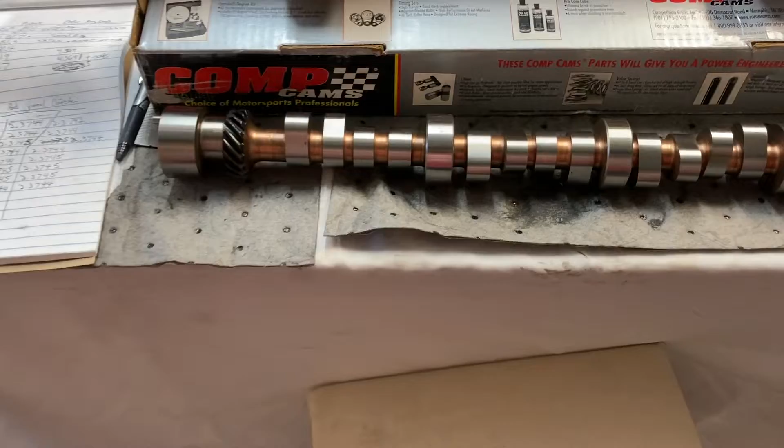Question number one, what cam am I running? This is a Comp hydraulic roller. There's a part number, I've shown you this before, some of the specs, and you'll see it's from 2007. So this is a new old stock cam I got from a special source, I'll say, Mr. Rodney Bird.

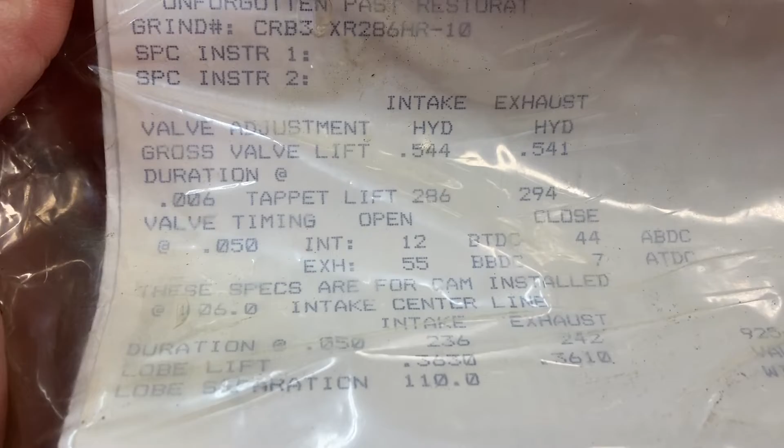And Ed checked that for me for straightness at Ed's Machine. There's a cam card, we'll use it here shortly. And we'll be checking the center line. It's a 106.

Before I stick this in the engine, I'm gonna get it cleaned up, some brake cleaner, lubed up, all that jazz.

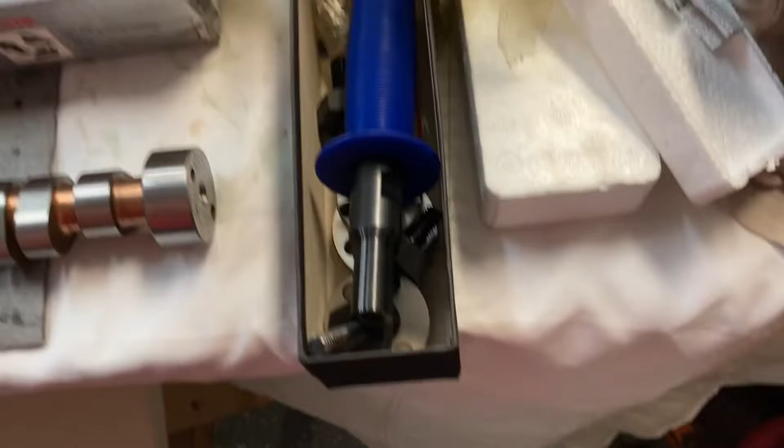I actually had a viewer a while back send me this awesome camshaft installation handle, and it's really nice for stuff like this. It's got all your adapters and such, bolt onto the front of this. This is a 3-bolt, so it'll bolt onto the front and you can use that big, beautiful, heavy handle instead of a bolt or whatever else. That's what I'm used to using. So I've used this once so far and it worked out really nicely for me.

Over here, I got this tech tip from Ed's Machine as well. Put you a sheet of paper under your magnetic base so it doesn't scratch up your brand new resurfaced deck.

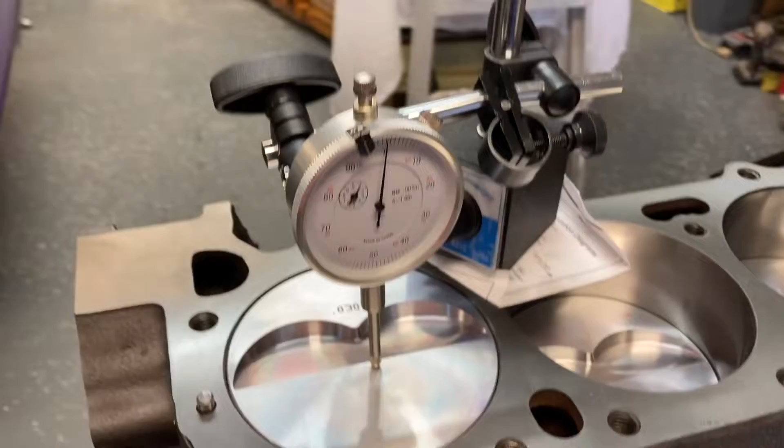See the lines there? So I have found top dead center just by setting that up, zeroing it out. And as I turn, oh yeah, you'll see my new snout socket on. But as I turn, we watch, it's going away from the zero. I'll flip my ratchet back.

She comes back to the zero and touches. That's it, no more. If I keep going, it goes like that. I don't want that, so let's put her back on zero.

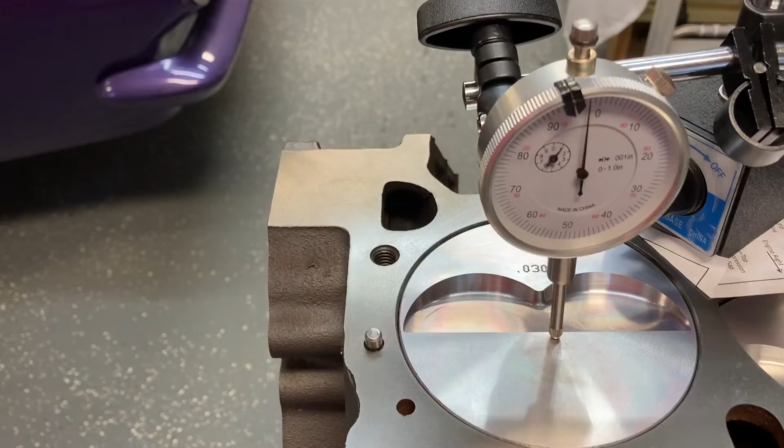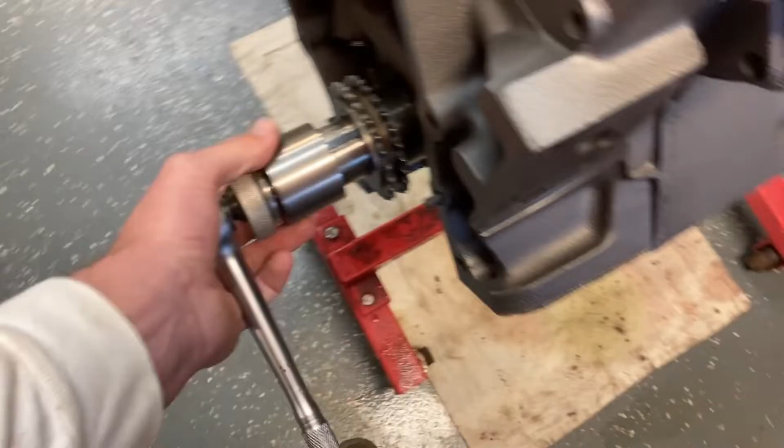Right there, my camshaft degree wheel will go on this knurled nut here just shortly, but I want to get the cam stuck in first.

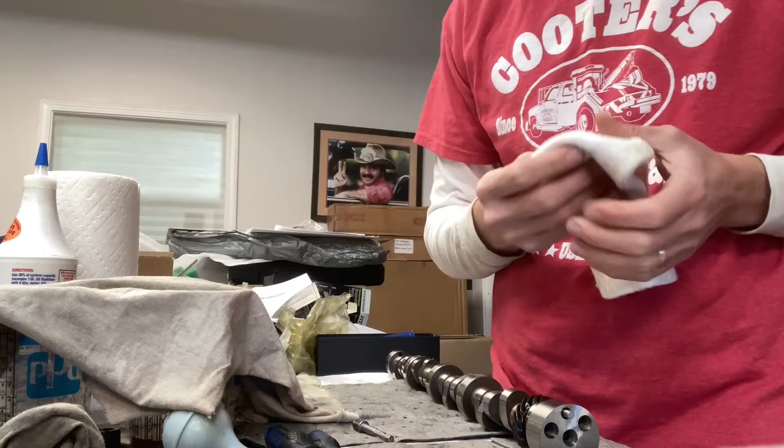Obviously I'll wipe out my cam bearings, lube it up, be sure she free spins. I got a new sock here. See, I wiped some red marker off with it a minute ago.

Get it lubed up, soak her down. It just comes with that kind of rust preventative stuff on it, and he may have coated this in the past few years.

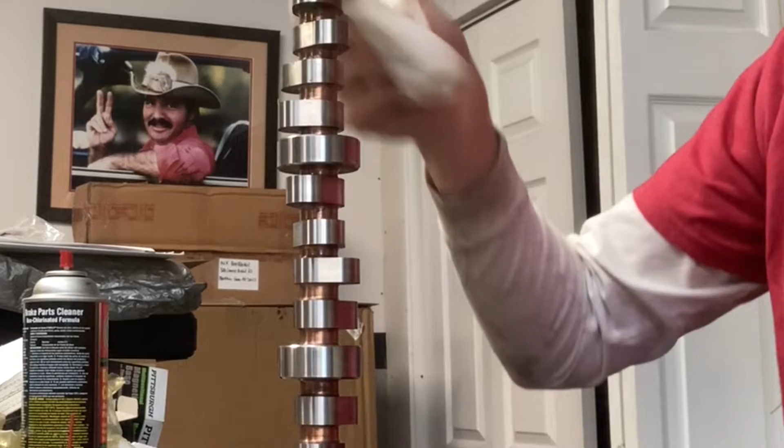It's a nice billet core, which are not really super, you don't see them as often anymore. They're becoming less available, let's say. And this camshaft may not be the perfect grind for this engine.

It will work, I think it'll work really well, especially when I tell you what I'm doing with it. So you saw all those specs and the differences I'm making.

Number one, I'm using 1.6 rockers. I've got getting some rockers from Mr. Rick Seaman. If y'all haven't seen his channel, check it out. He does a step-by-step build like this, except it's of a Hemi. Probably the best Hemi build you'll see on YouTube that I've ever seen on YouTube, for sure. So go check that out if you have not already.

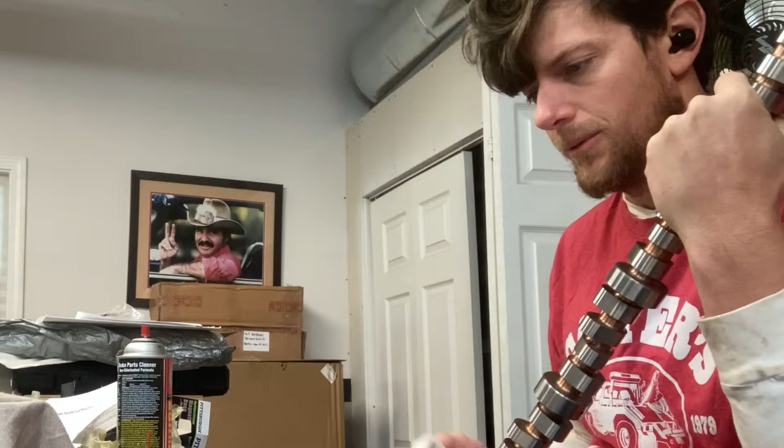So that'll bring my lift up, I think, to about .568. Add a little duration, different sources tell you different things on that. I read a Motor Trend article that said it could add up to 20 degrees of advertised. That seems like a lot. So just do your own independent research and come to your own conclusion on that.

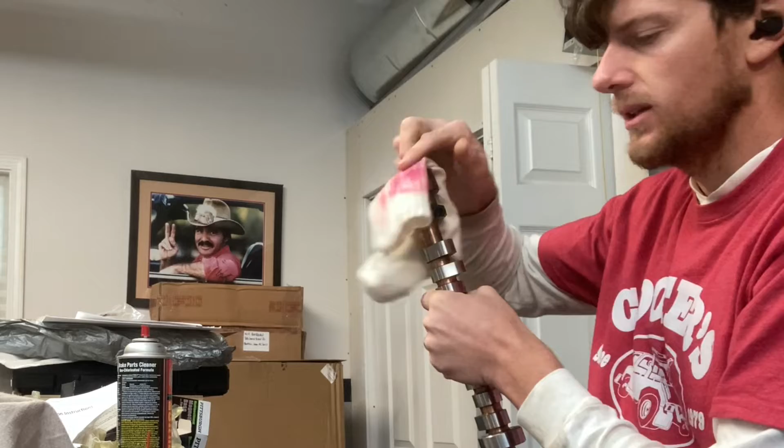There we are. Okay, so here's how this works. They give you different sized ends, whatever you want to call them. Then it has this recessed Allen bolt. The Allen bolt goes in, screws into the end of your cam handle.

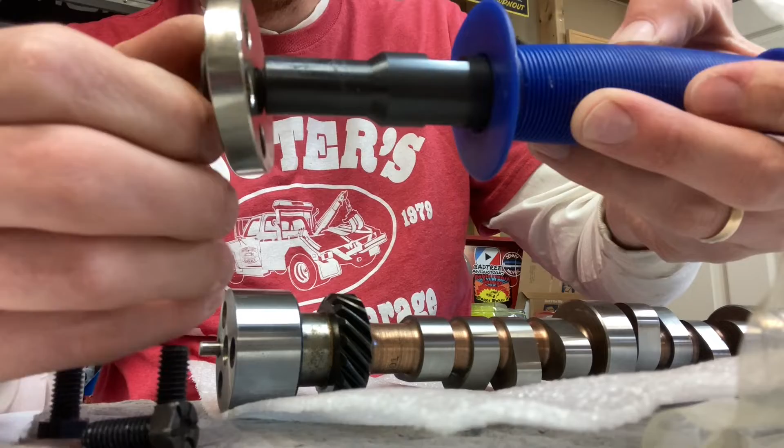So I've already matched that up. I need to get the correct size Allen wrench and maybe just keep one in the box. Allen wrench in, give her a tighten up. Doesn't have to be super tight. And then that goes on the front side of your cam.

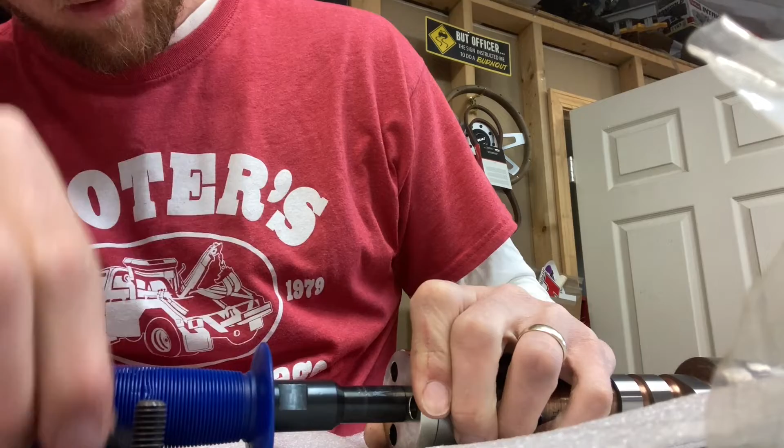Very simple, I dig this thing, it's cool. I believe Mr. Biggin Johnson gave me this. That's a name I cannot forget.

And I don't think I'll be able to use these bolts with my cam handle, but I'll check. These are three factory bolts for a 3-bolt cam in a Mopar. They came out of a 413. I don't know if they'll work with my cam handle or not. Yeah, they're close. Number 3.

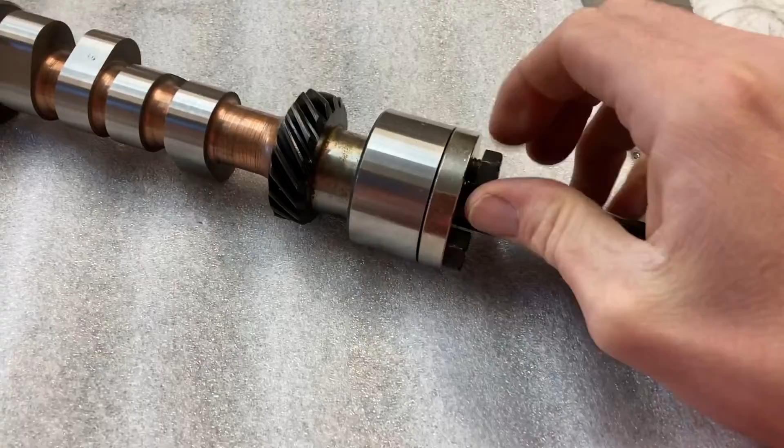Got my camshaft right here. I'm gonna use my semi-synthetic assembly lube from Lucas. I'm only doing the journals right now. I'm not worried about the lobes, those just get engine oil later.

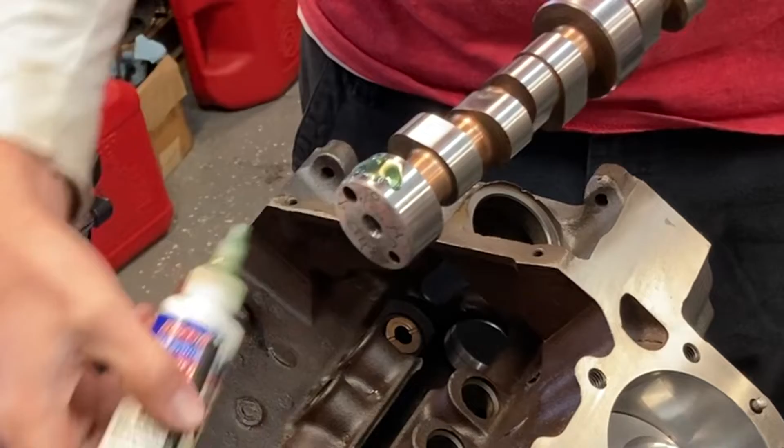I can put oil on the lobes now, but I don't think it really matters. If I go through and squirt some in later, it should be good. Let's do each journal. I've went ahead and oiled every cam bearing, so they're good to go. But look how nice and tacky that stuff is.

So when that mixes with the little bit of oil that's already on there, it should be nice. If I didn't have this, I'd use my Lucas 50/50 mix. And run her in. I'm actually right-handed, so this was probably a bad idea to film this way, but that's okay.

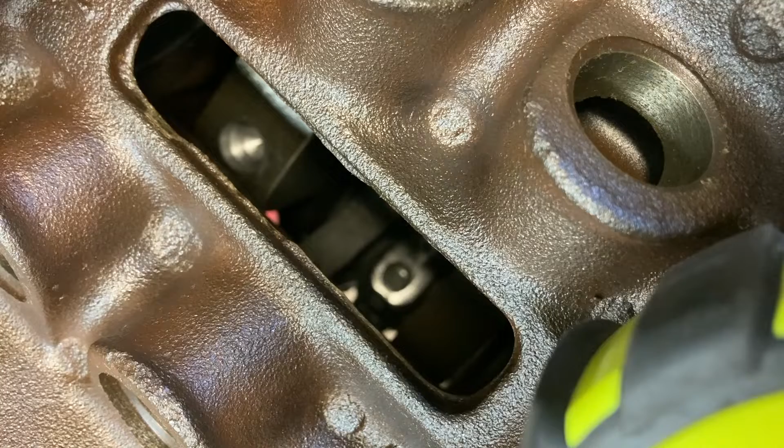Get that first one setting there. Don't mess it up. There we are. I got you on the very last row there. Coming in. Oh yeah. Give her a little spin as I go in. And that's all there is, and there ain't no more.

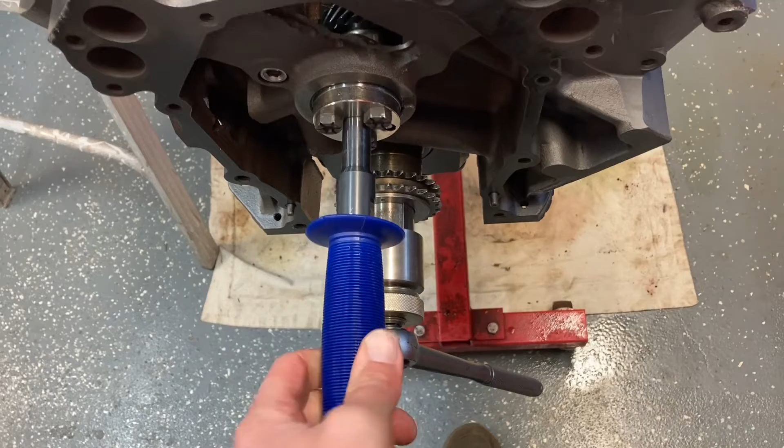Spins real nice and freely. It may have a little drag because of that thick lube, but that's okay. Very nice. All right, let's have a little timing chain tech.

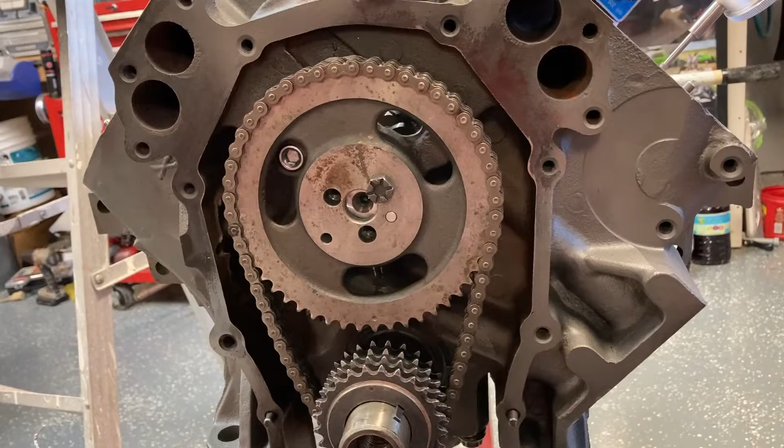So this is not an expensive timing set at all. I actually have two or three different timing sets I'm looking at. I have a new chain, and I got a bunch of new chains and new sprockets. See, these are sprockets, these are not called gears. When I did my Michigan parts trip, so I'm trying to use some of that stuff up.

This is not really an expensive engine by any means, so I don't have to have a $250 special setup or anything like that. I want to check the degree on the cam, and if it's off, I can use other measures. But right now I'm just checking it with the stuff I have, and I'll probably end up using one of these combinations. But I wanted to show you, I just stuck this extra sprocket on here so you could see the different wear patterns.

This one, I'll use my pointer, there we go. These teeth are very, very sharp compared to those teeth. Those teeth have kind of a flattened edge on them. I don't know if I can get in and see that or not, but a lot more flattened, less wear. If you look through here, there's a little bit of wear in the pattern.

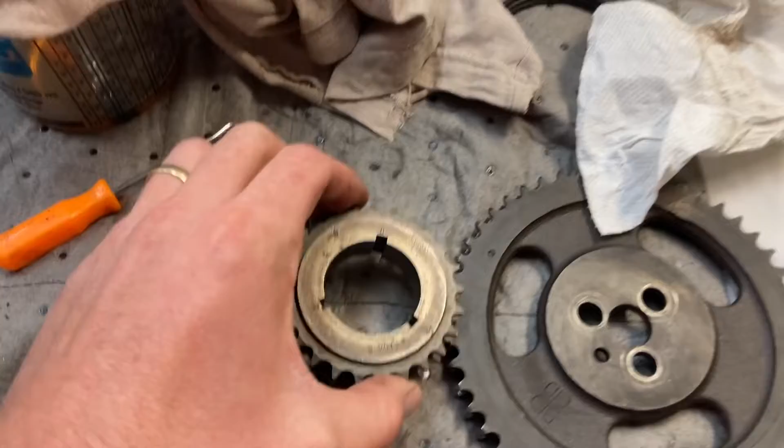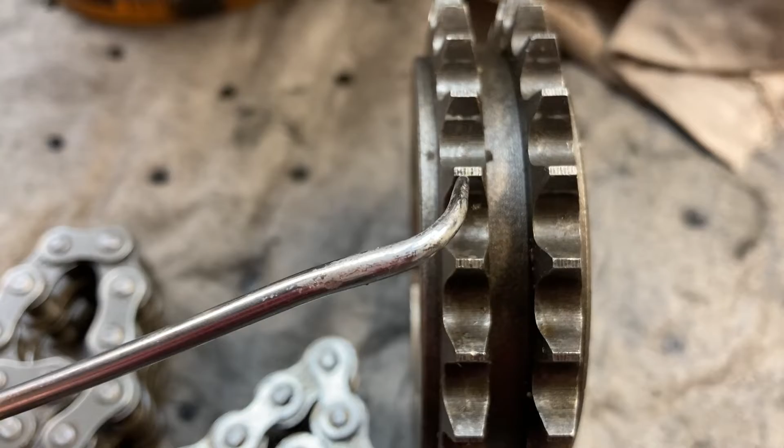So I wanted to show you here, there's kind of the one you can advance and retard with, and I think they say it's 4 degrees, but I wanted you to check out the difference in that one. See how big and square those are? You still see the lines on top of here. I'm not sure if this one was ever ran, it looks dirty, but it will not work with every chain.

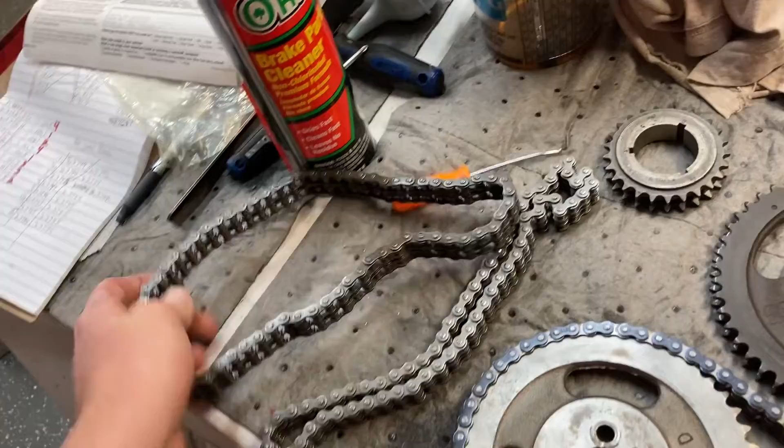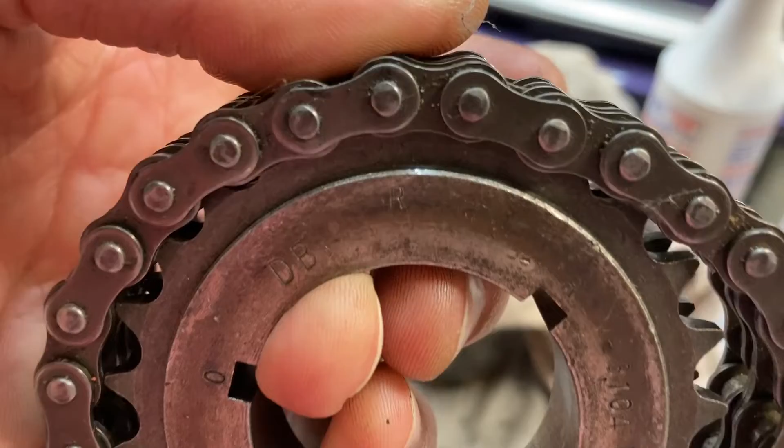So, for example, this chain's been used before. I don't plan on using it, but I have it in the collection. This is a new chain. And if I take that sprocket and try to drop it into here, look at how the rollers are not dropping into the sprocket all the way. I cannot use this bottom gear with this chain or either of these chains because it's got a little bit different makeup. I'm assuming this one was for a full roller chain.

None of these have the links that roll inside of them, so they're not as nice as a full roller setup. But this is a brand new chain that I got in my Michigan parts, and it says USA on it. It's actually in a Mopar box, so I'm not sure how old it was. I'm gonna probably try that chain on my best bottom gear that I have, just to degree this cam with, or check the degree.

Part of that is because this chain's super sloppy. I watched Mr. David Vizard's video where he discussed it was like 10 horsepower difference on the dyno between a super tight chain and one with a little slack. So in theory this may make more power, but I'd like it a little tighter than that. That chain's probably been worn before or ran on something.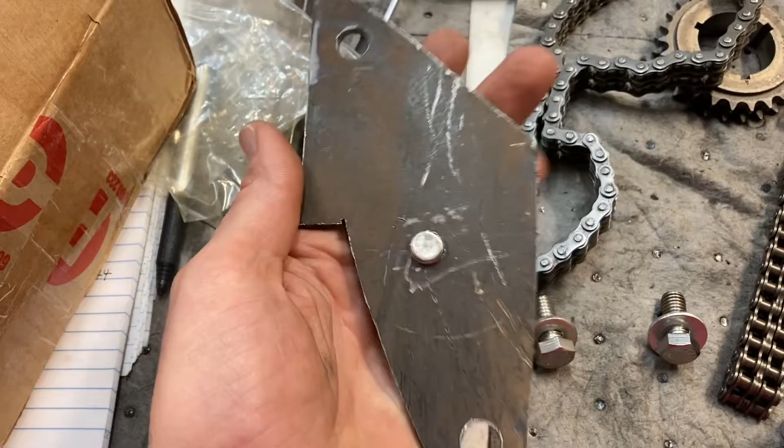I'm gonna switch over to my other chain and we'll start to degree. I made myself a beautiful piston stop. I did grind the end of that bolt off where it's nice and flat so it won't dig into my piston. I'll probably paint this thing at some point, but I'm trying to degree a cam today. It's I think a 7/16 bolt.

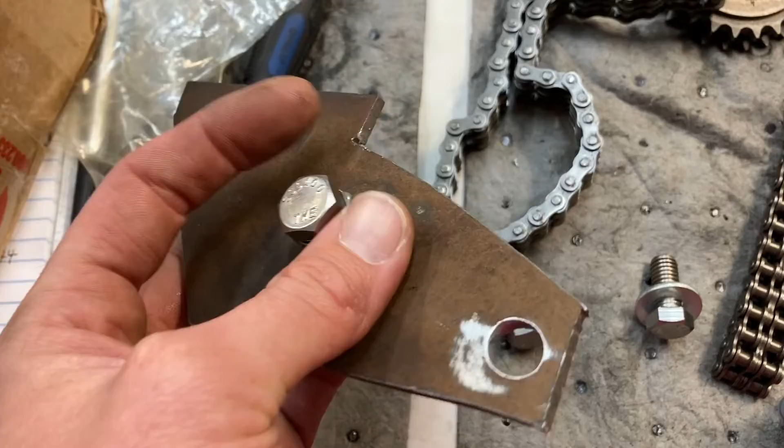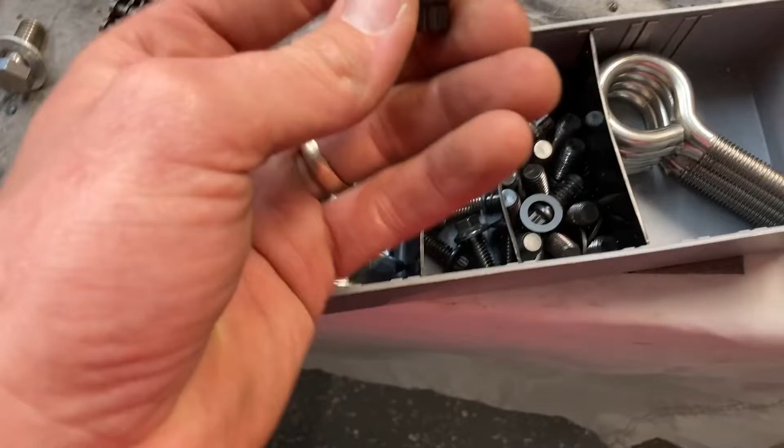Found a couple more, and while I was looking through my bolts I found a little selection of ARPs. My brother Drew, if y'all saw the No Name Nationals videos where I had my purple car there, dropped off a bunch of bolts a while back and said I'll use them in something, and that is exactly what I need - three of those to go on a gear like that.

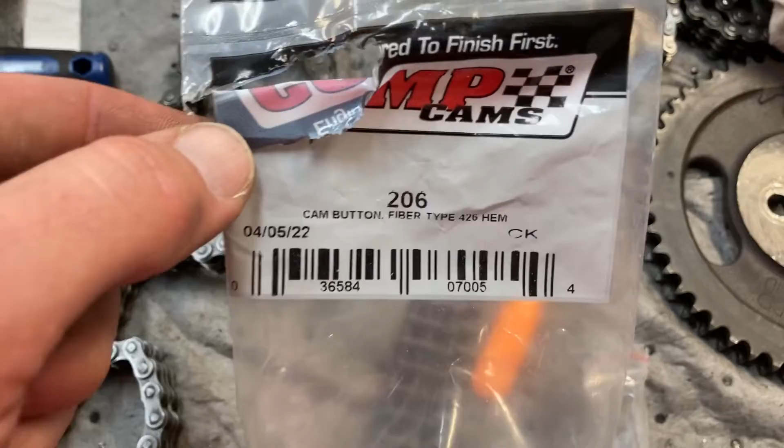This is the Comp 206 button. I've been talking with Ed about how to measure and cut, but I'll need that little shim to drop in. This is not the gear I'm using, the one over there. But you knock it in, press it in, then the button itself will set in between there, like so. I'll do that in another video, but I'm gonna get my stop set up.

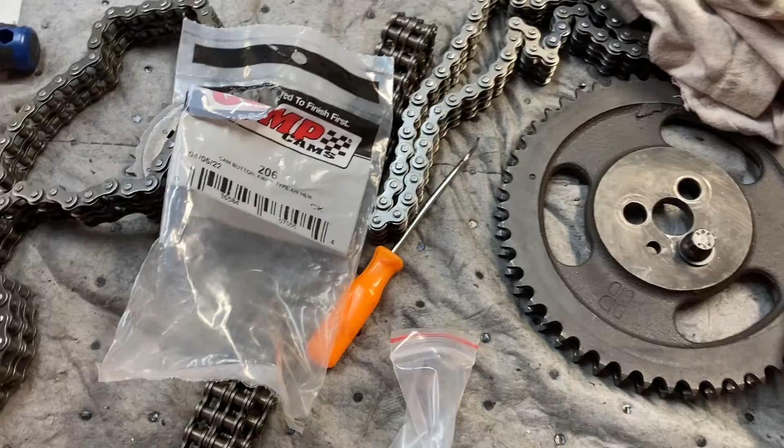I just wanted to show y'all I found some bolts. I got my pointer on, bolted down there with a little stud. It's the exact same one I used last time, so that's nice.

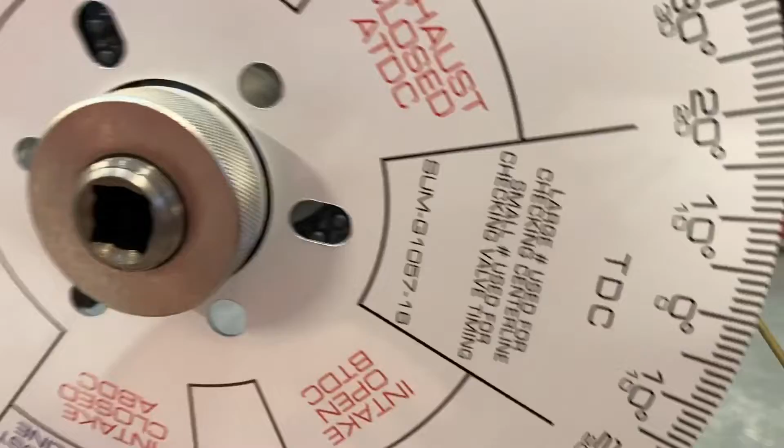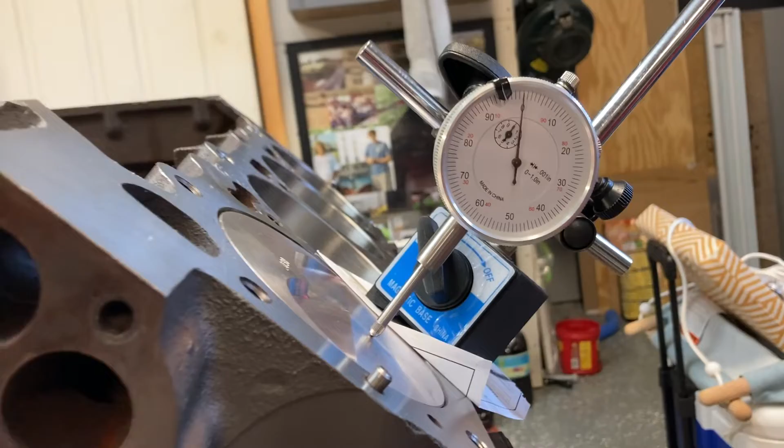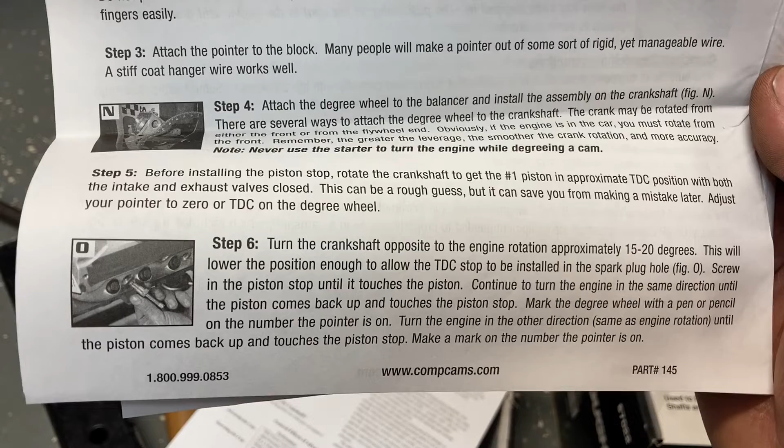Lined up with 0 here, and our piston is at top dead center. So now I'll be able to take my gauge off here. I'm following along with the Comp instructions, and it says attach the degree wheel - the crank may be rotated. Before installing the piston stop, rotate the crankshaft to get the number 1 piston in approximate top dead center position with both the intake and exhaust valves closed. This can be a rough guess, but it saves you time and mistakes later.

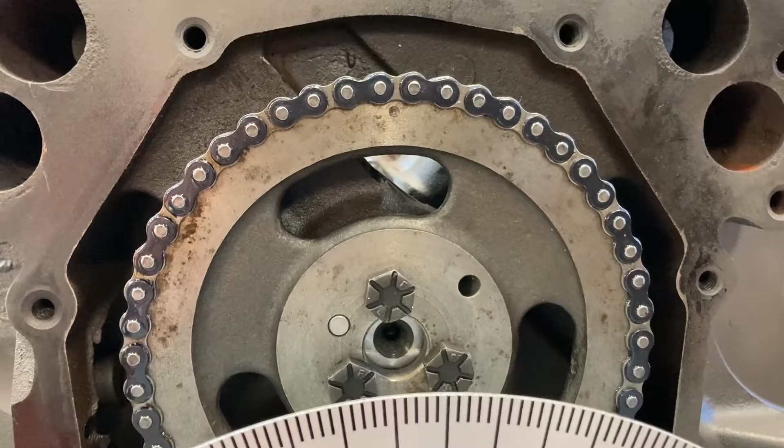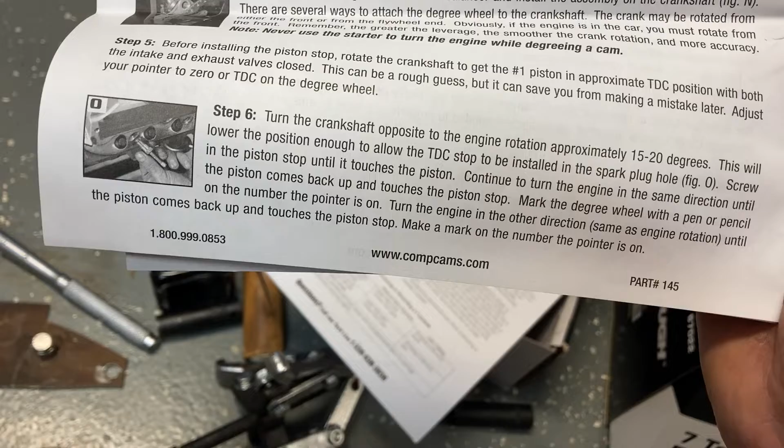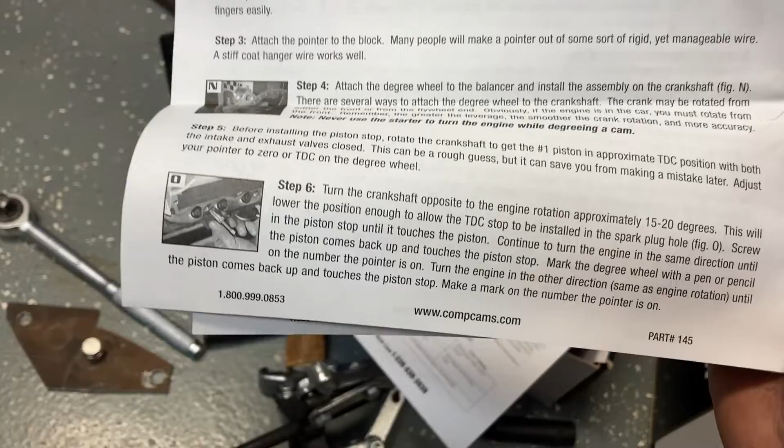We have that - see, our dot is at the top. So our dot is up there. The bottom dot, I don't know if you can see it, is right there, straight to our hole. Now it says turn the crankshaft opposite to the engine rotation approximately 15 to 20 degrees. This will lower the piston enough to allow the TDC stop to be installed in the spark plug hole. We're not using the spark plug hole, so I'll go opposite of that 15 degrees.

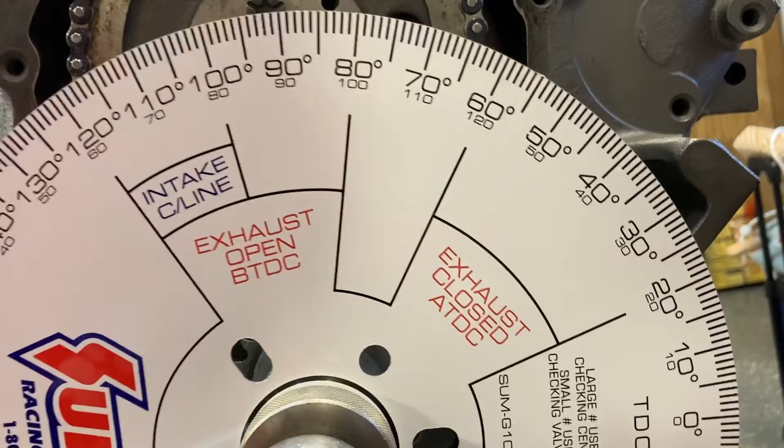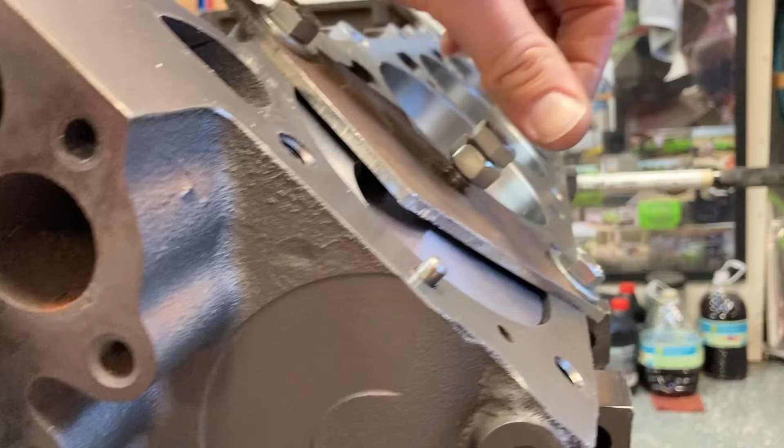Trying to be careful here. Right there, about 16, that's fine. And I'll pop my stuff off. And there she is. I probably should have moved my stop down just a little bit, but it does not go into the valve reliefs.

We're gonna screw her down until she touches. Right there. And then our little lock nut. Continue to turn the engine in the same direction until the piston comes back up and touches the piston stop.

Mark the degree with a pen or pencil, whatever number it's on. So I was going counterclockwise, the opposite, so I should be going down just like that. Coming back up - you be really, really, really careful. That's it. You can see my very, very faint pencil mark there.

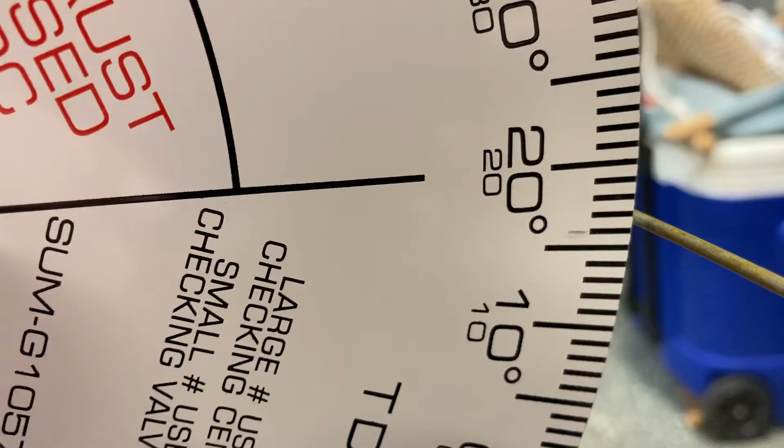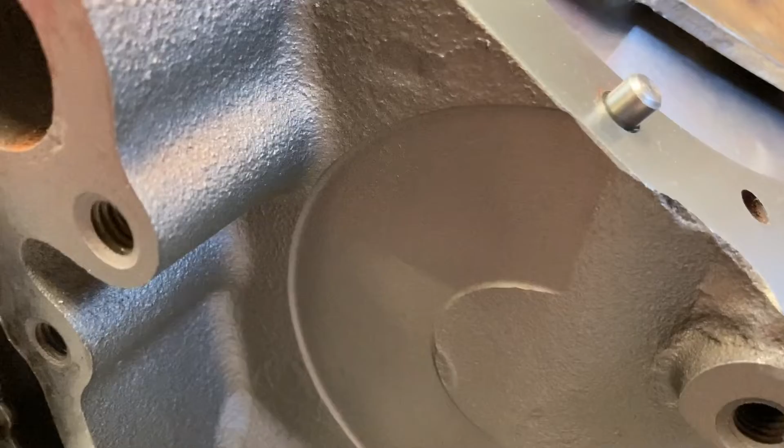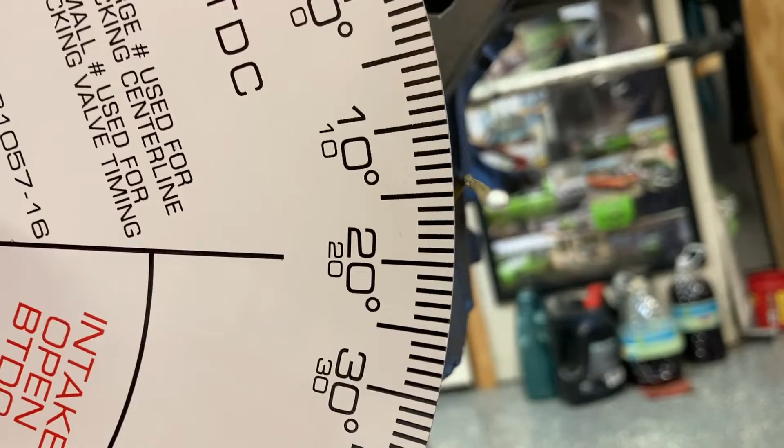Now we're going to go opposite rotation, just like the engine turns. And our piston will go down. And at some point it will come back up to our stop. Right there. And we are at about 14, call it 15 right there.

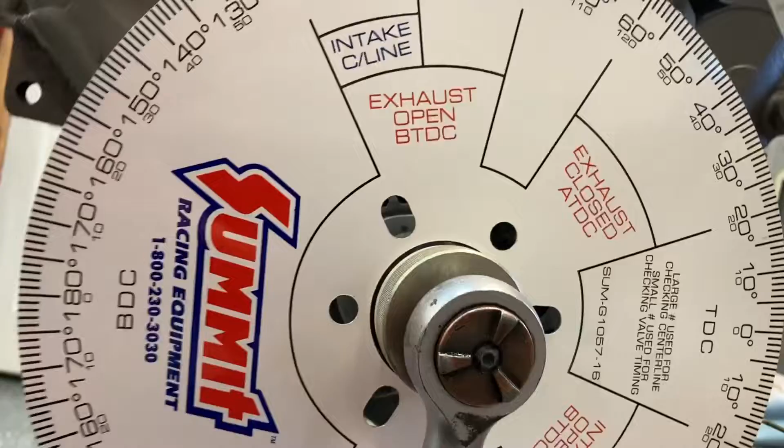Just like that, there we are. The piston stop is removed. What I'm going to do is go in between those two marks and make that my new zero.

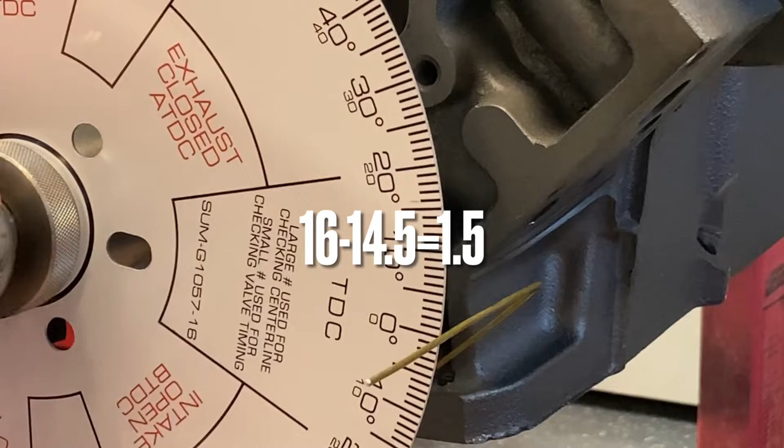So that is 14 and a half, and that one is 16. 16 minus 14.5 is 1.5. There's our 1.5 degree. So now it's the one on the top side, since that one was further that way.

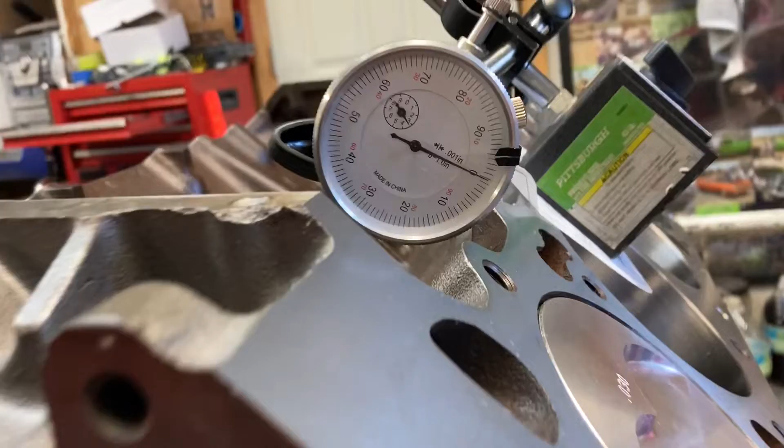I will reset my wheel now so that my zero is on the pointer. I guess I could bend the pointer if I wanted to, but I'd rather move the wheel. All right, I got her set up on the very top of that solid lifter. I'm just going to watch it and be sure it doesn't move around. I'm on zero here, and I just zeroed that out.

So what I need to do is spin it until at the top of that cam lobe, where that cam lobe is up, in the normal direction of rotation until you reach maximum lift. The dial indicator will change direction at the point of maximum lift. At this point, set the dial to zero.

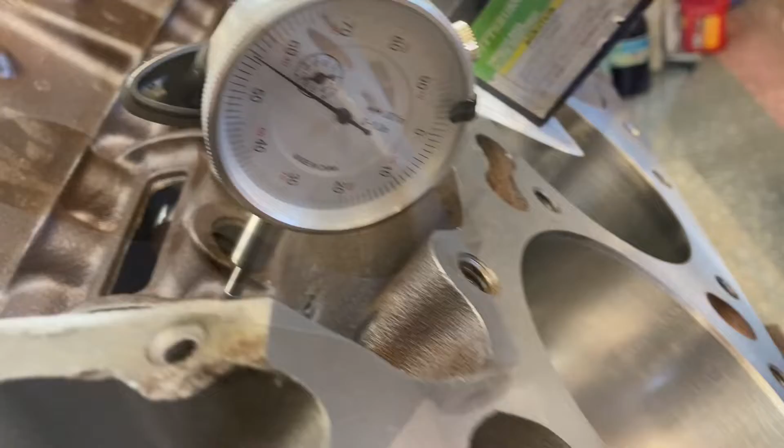I can see it coming up. Right now. I gotta be getting close. Okay, we just barely moved.

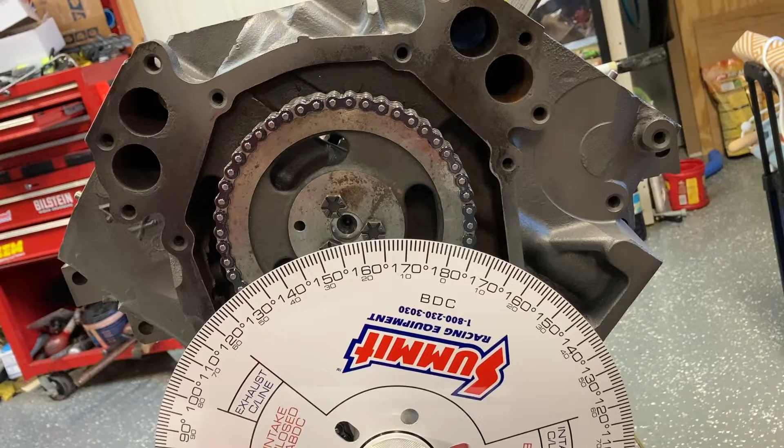Okay, so we set our dial to zero. We're going to back the engine up, opposite of normal rotation, until the indicator reads 100 thousandths. Then we're going to turn the engine forward in the normal direction of rotation until the dial indicator reads 50 thousandths. So we back up 100 and then we go forward 50. Or opposite direction 100.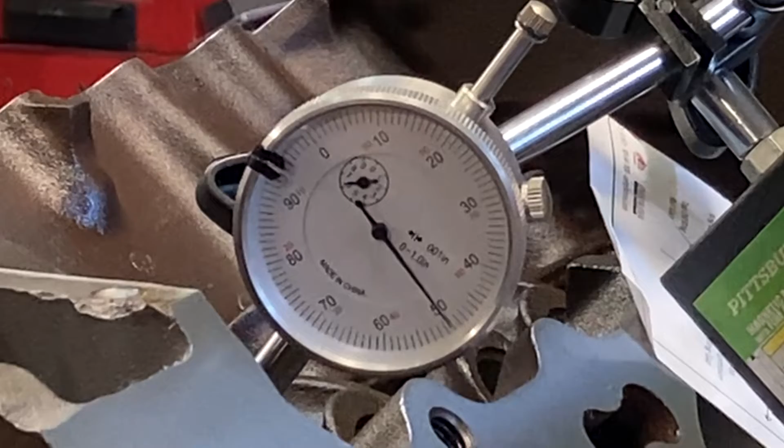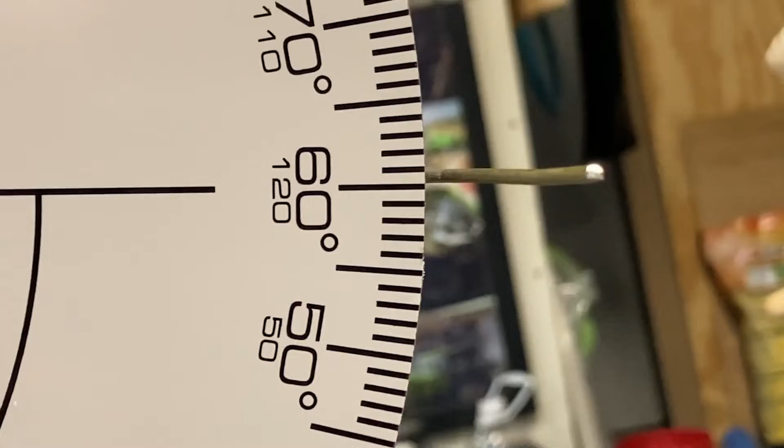Coming up to it. Right there. Now we're going back, or forward the normal rotation, 50. There, perfect. So we need to record this number. I would call that 60 and a half. We'll jot that down. Now we're going to continue to rotate the engine in its normal direction of rotation

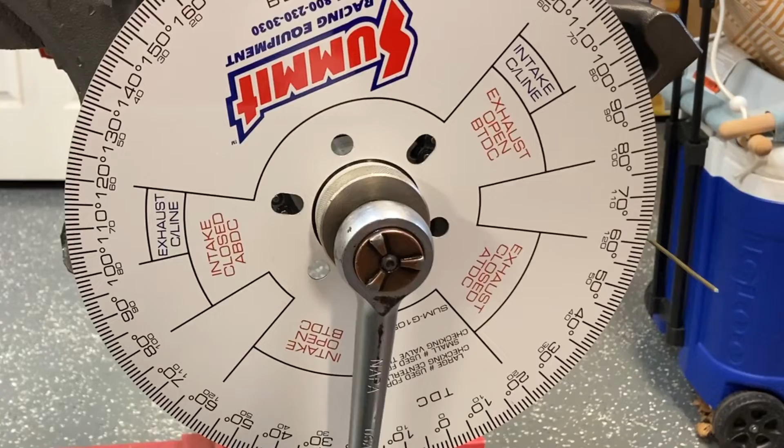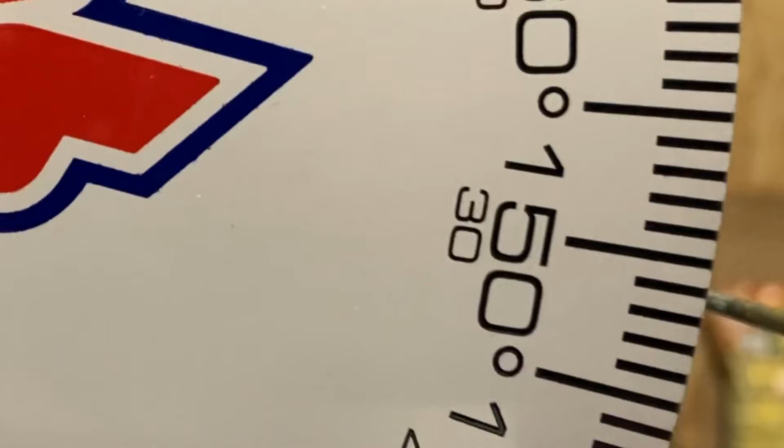until the indicator goes past zero to 50 on the closing side of maximum lift. Right there, I would call it 148.5 — there's our two figures added. We divide by 2 and we got 104.5. So our cam card says we should be at 106.

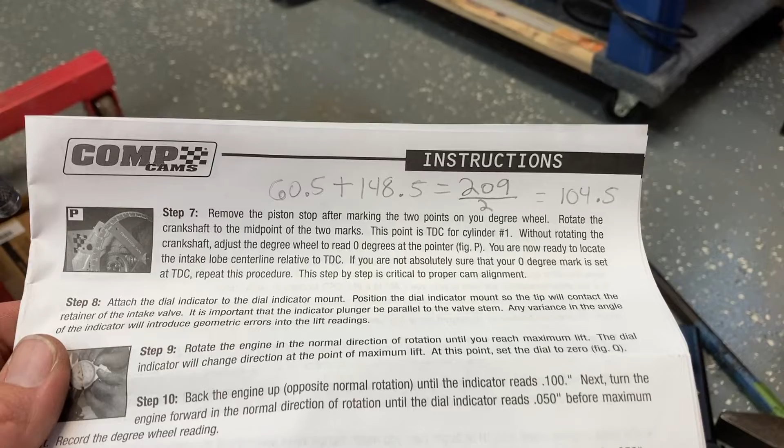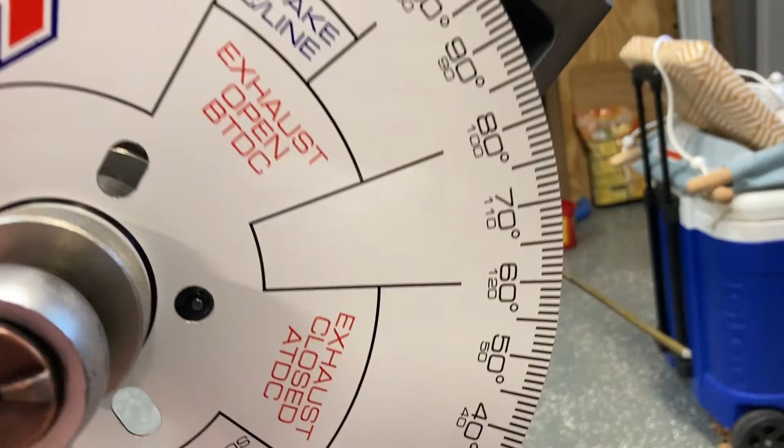What I'm going to do is do this entire process over one time and share with you my results, see if we can repeat it. All right, my first number now is 60.

You can almost call it 60.5, but it is right on 60. Closer to 60 this time. Now we go 50 the other side. And my second number is 149. There's our first try, and there's our second try.

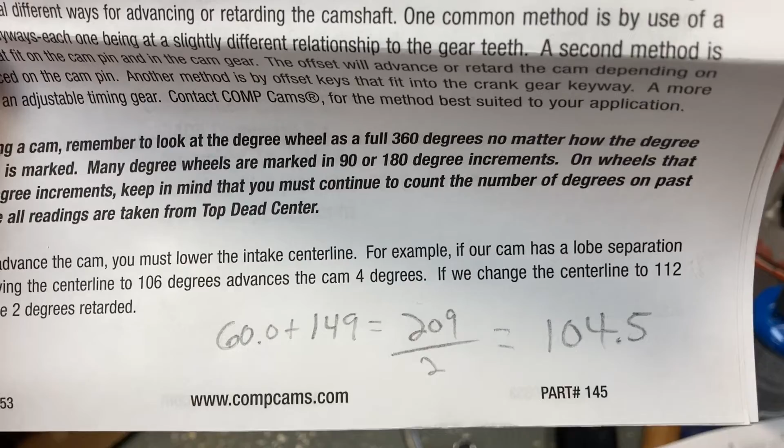So the math is there. This thing is looking like a 104.5 centerline. So here's my final thoughts: it's going to be at 104.5, which is advanced. It's going to cause the power to come in a little bit sooner, and I think that'll be good, especially with this very super short stroke.

Give me a little more bottom end, and it'll have more cylinder pressure. I had a guy contact me somewhere, I can't remember if it was Facebook or what — said he runs these Keith Black pistons and he only has, I think, 120 pounds of cranking compression, something like that. So a little more cylinder pressure would be nice.

And some more bottom end. When I put this in my Barracuda, the Barracuda's only got 4.10 gears, a 28-inch tall tire. I may switch to a 4.56 later, but having that advanced, I don't think it's going to hurt anything at all. So I'll stick with this chain setup.

Also, you'll notice the chain itself was pretty tight, so it's going to stretch some. And when it stretches, that 1.5 degrees may actually come back.

I'm pretty satisfied. I think it's a really nice cam. I think I'm still building a very inexpensive engine — you can't say it's cheap, nothing's cheap anymore, but it has some good parts in it.

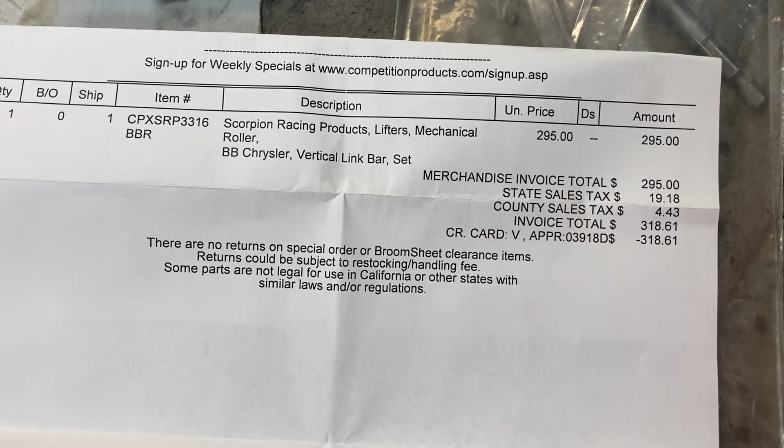And I'll leave you with this last deal here. Here are my lifters for this — you'll notice they are Scorpion Racing products, this was Competition Products. Rodney Bird said, man, they got a sale on lifters, you better buy some. Big Block Chrysler, they were $295, so $318 to my door. There's the part number. And when you get them opened up, see, I've got one set in the engine, cleaned up and in already.

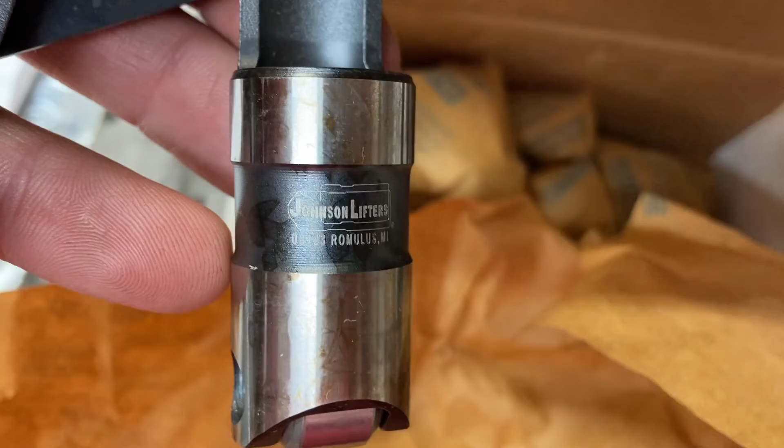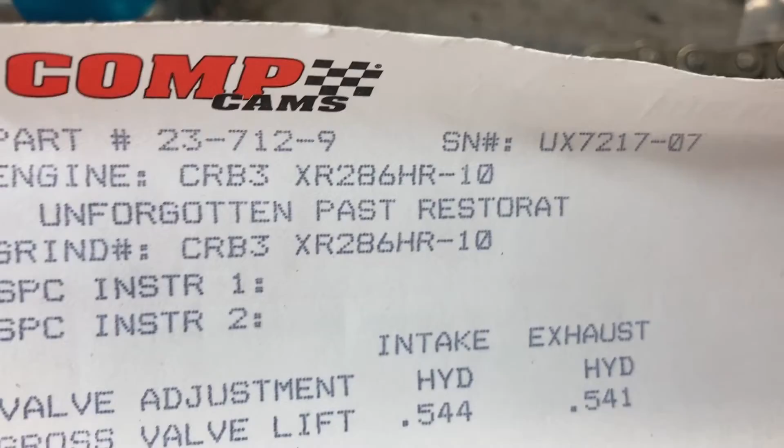They are some Johnsons, so super nice pieces. I'm excited to try this, I have not yet. You'll remember the cam, that HR means hydraulic roller — these are going to be solid lifters on a hydraulic roller cam. So, hope y'all hang out and we'll see how she runs. Thank y'all.